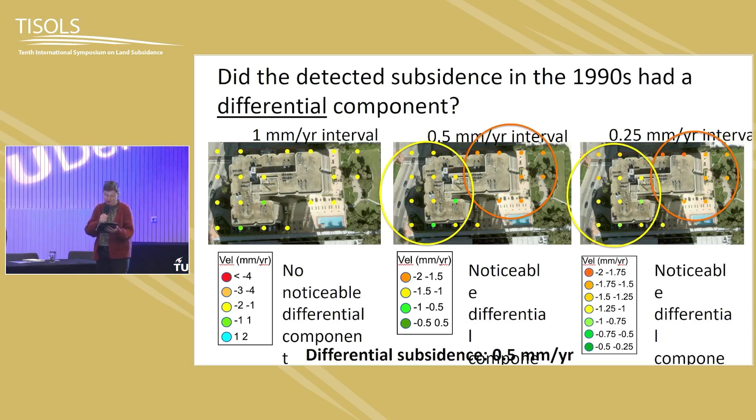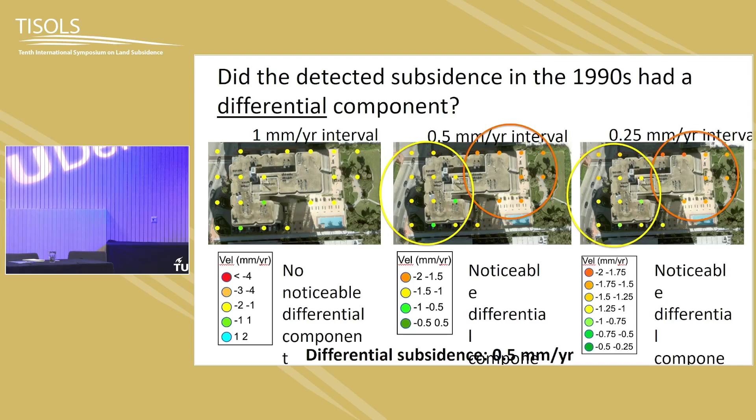Then now we move on to the last presentation in this session for today. It will be given by Yan Xu from the Geological Survey of Shanghai. And the presentation will be on a study on the influence of supertall building load on adjacent tunnel subsidence.

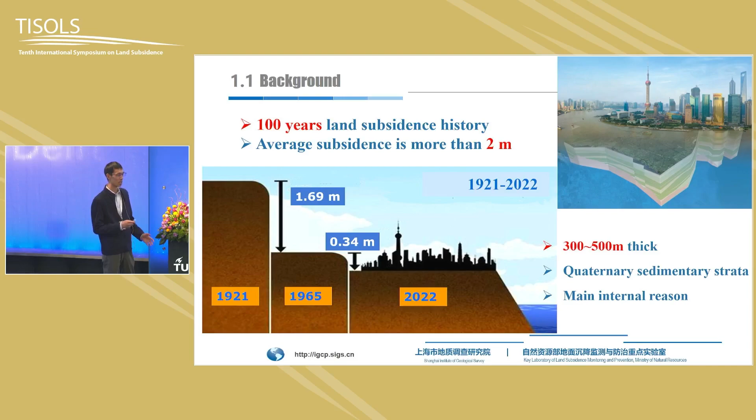So as we know, Shanghai has a long history of land subsidence and serious land subsidence. In the past 100 years, the average subsidence in Shanghai is more than 2 meters. So there are 300 to 500 meters thick quaternary sedimentary strata widely distributed in this area, which is the main internal reason of the land subsidence in Shanghai from the past until now. So for the urban development, there are various infrastructures that have to be built.

Okay. Okay, thank you very much.

Okay, thank you. So there are various infrastructures built at different depths in this subsoil, such as the municipal pipelines, the transport infrastructures, including the metro lines. Nowadays, the underground infrastructure is usually built below 40 meters. So I think it will be developed deeper and deeper in the future.

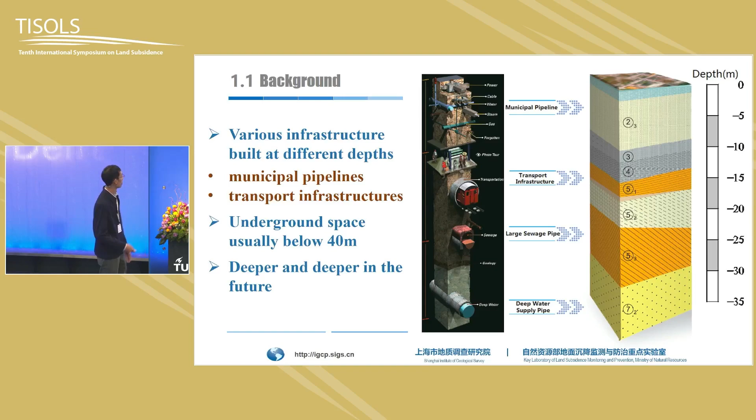So there are 5 confined aquifers in Shanghai under the ground surface. So the land subsidence characteristics here will develop with the change of the groundwater level and the process of urban development. So at present, under the premise of controlling land subsidence, the extraction of water from the aquifers is already less than 1 million tons a year. And the artificial recharge remains at a stage of 20 million tons a year. So the groundwater keeps rising here.

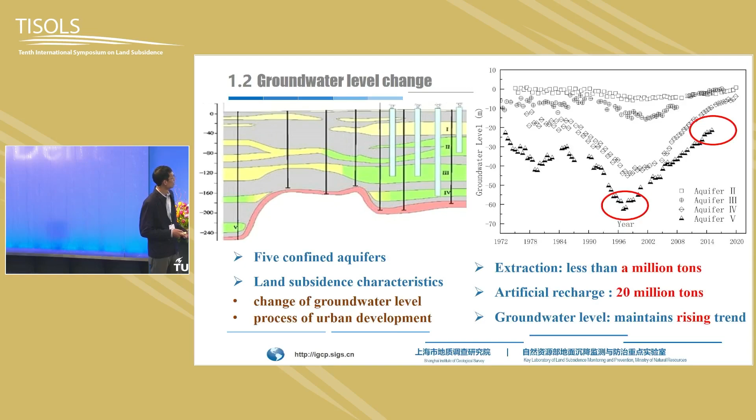And as we can see in the figure, by 2020, compared with the historical lowest water level of confined aquifer 5, the water level rose over 40 meters in the past years, and it still maintained a rising trend.

So the metro tunnel is usually built at a depth of 5 to 30 meters in soft soil areas. So the additional stress caused by the uneven deformation of the surrounding soil layers can apply directly to the underground tunnels passing through them.

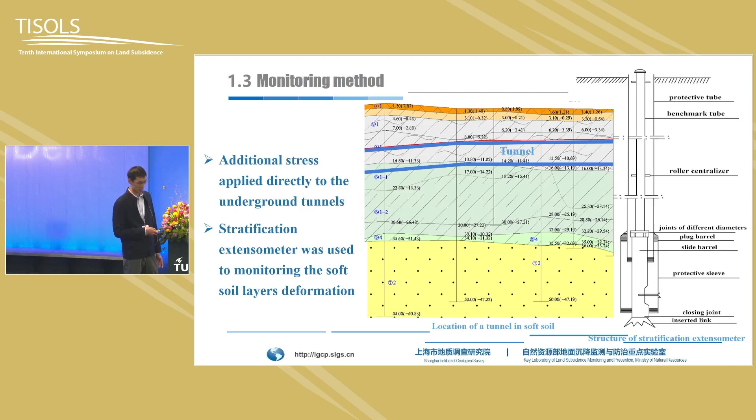So we use multiple methods to monitor the deformation of the soils, such as InSAR, GNSS, and leveling, as well as the stratification extensometers. So in this study, we analyze mainly based on the data from the extensometers. We selected 2 typical metro lines in Shanghai, and the monitoring work started when the tunnel construction was completed. And line B was built nearly 10 years after line A.

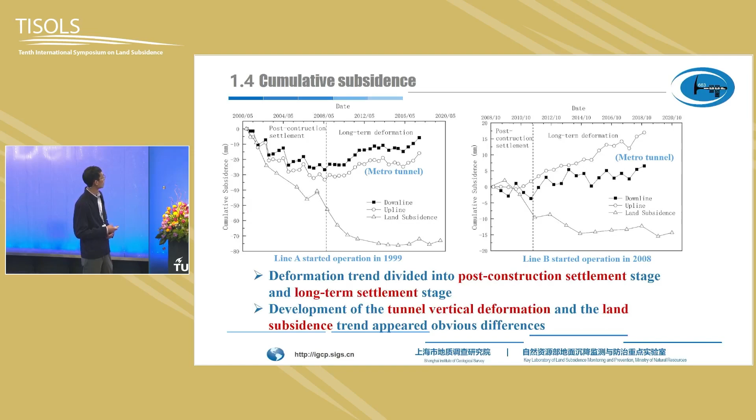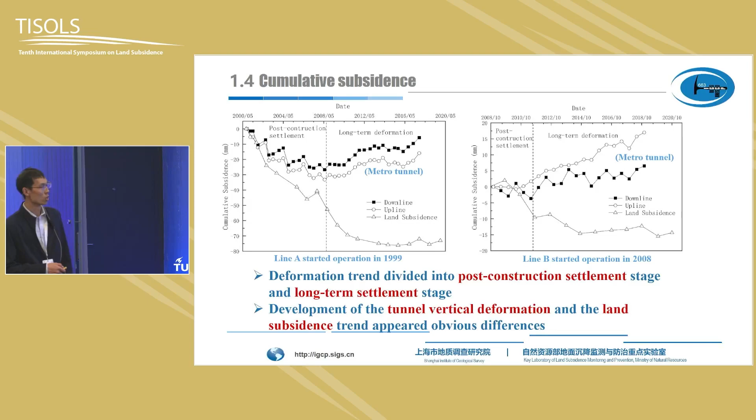We can see that the deformation trend of line A can be directly divided into the post-construction settlement and the long-term deformation stage. But the post-construction settlement of line B is short. But for both lines, the development of the tunnel vertical deformation and the land subsidence trend appeared obvious differences. So why is this?

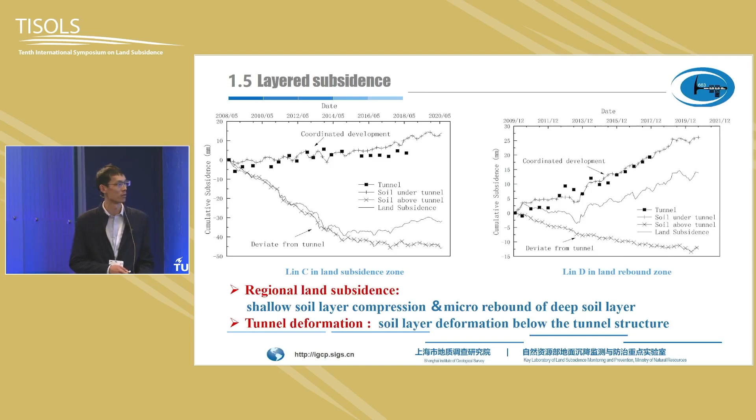But the soil layer under the tunnel appeared a trend of rebound, and the rebound rate is still accelerating. And for both tunnels, the tunnel deformation is coordinated and controlled by the soil layer deformation under the tunnel structure. So in the second part, I will introduce the influence of supertall building load on the adjacent tunnel subsidence.

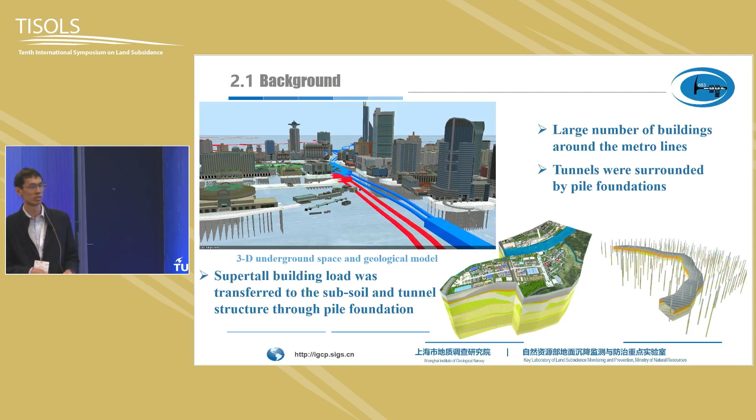For the functional needs of the city, there are usually large numbers of buildings around the tunnel. So the left picture is the 3D underground space and geological model of Shanghai. We can see that there are a lot of tunnels. The tunnels are surrounded by a lot of pile foundations, and the supertall building load can be transferred to the subsoil and the tunnel structure through the pile foundations.

So we selected a typical area in Shanghai for this analysis. The buildings B, C, and D are existing buildings over 300 meters high, and there is a park with no building built north of the tunnel, and the land subsidence monitoring station is located south of

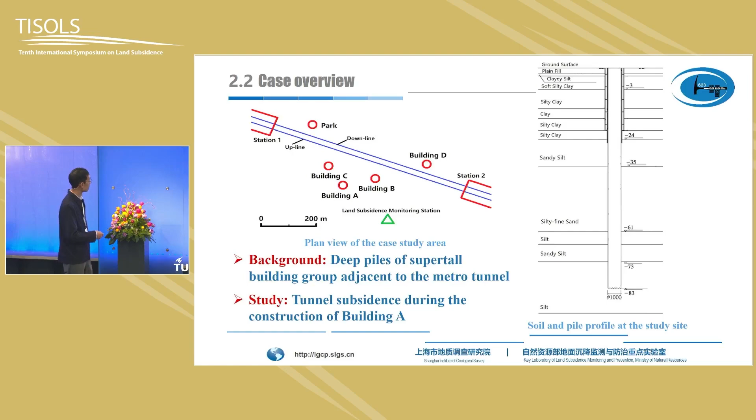this area. Building A is the newly built building with a height of over 500 meters, and the pile foundation of building A has a diameter of 1,000 millimeters and is 83 long. It passes through the soft clay and into the silt and sandy layer. So we will use this case to study the tunnel subsidence during the construction of building A.

So for a tunnel, the structure at each position will be affected by the surrounding tunnel structure. That means a deformation at a certain position of the tunnel will cause follow-up deformation of the surrounding tunnel structure. So in order to eliminate the influence of the general rebound, caused maybe by the groundwater level rise and the soil layer rebound, we set a reference point at the park.

There is no high-rise building built, and it is so interesting to find that the relative deformation appeared generally as subsidence instead of rebound. In the right picture, we can also find that the uneven subsidence can be clearly seen at the position of building A. So we successfully separated the influence of high-rise building load on the adjacent tunnel subsidence by setting reference points at the position of the park.

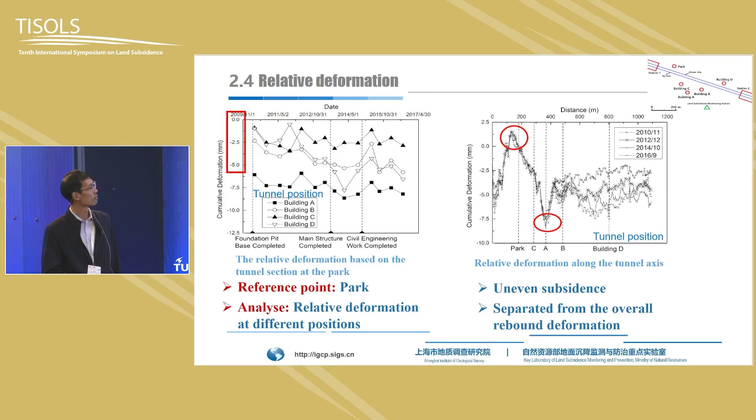So to study the influence of the supertall building load on adjacent tunnel structures, we should focus on the stress transfer pattern and the deformation of the deeper soils. As we know, the deformation of the tunnel structure is so complex that it's hard to describe accurately only from field monitoring data. So we also did some experiments to simplify the situation, and this part is not included in the 2020 paper submitted. I will make a brief introduction.

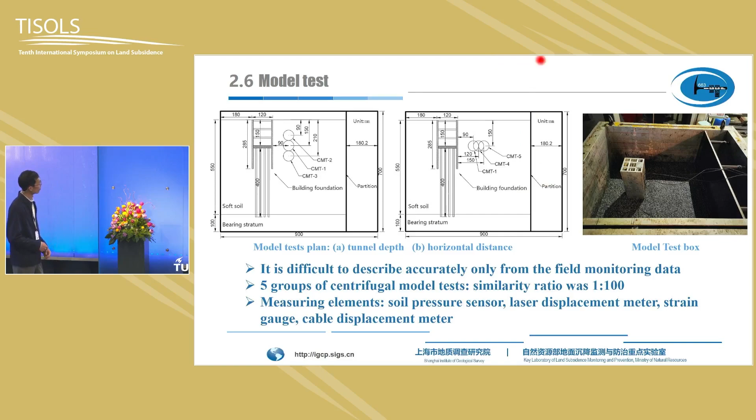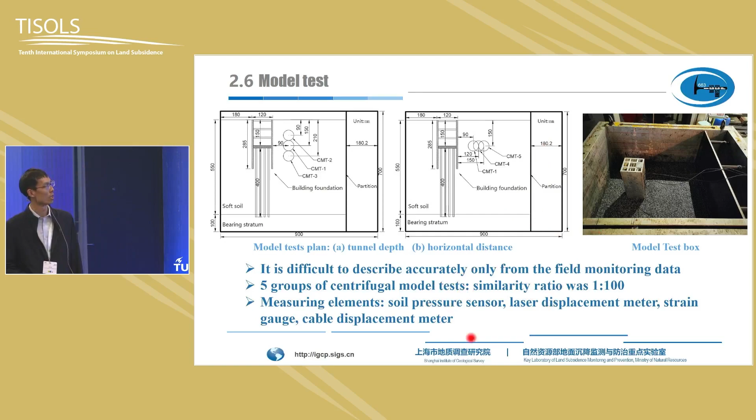First, we conducted 5 groups of centrifugal model tests, and the similarity ratio was 1 to 100. CMT1 is a standard group, the tunnel depth was changed in the CMT2 and CMT3 groups, and the horizontal distance between the tunnel and the pile structure was changed in the CMT4 and CMT5 groups. The measuring elements include the soil pressure sensor, the laser displacement meter, the strain gauge, as well as the cable displacement meter.

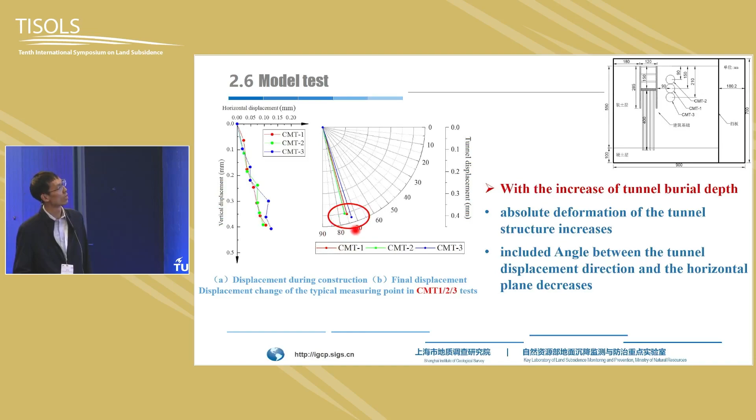From the preliminary results, the left picture is the displacement change of the typical measuring point in the CMT1, 2, and 3 tests. We can find that with the increase of the tunnel depth, the absolute deformation of the tunnel structure increases, and the included angle between the tunnel displacement direction and the horizontal plane decreases from 77 degrees to nearly 73 degrees. And another group focused on the factors of horizontal displacement.

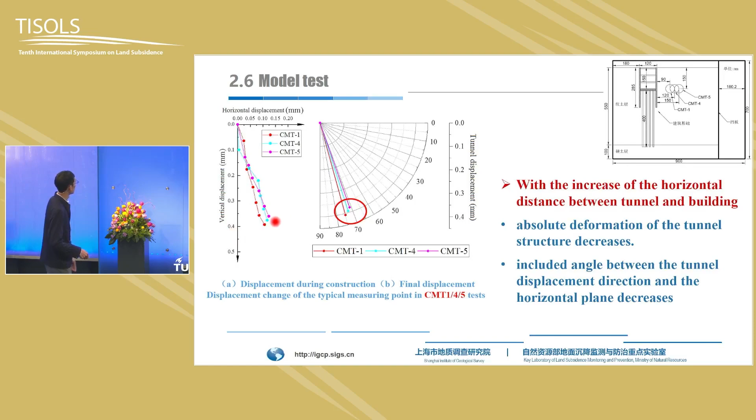So with the increase of the horizontal distance between the tunnel and the building, the absolute deformation of the tunnel structure decreases, which is different from the last group. And the included angle between the tunnel displacement direction and the horizontal plane decreases from maybe 75 degrees

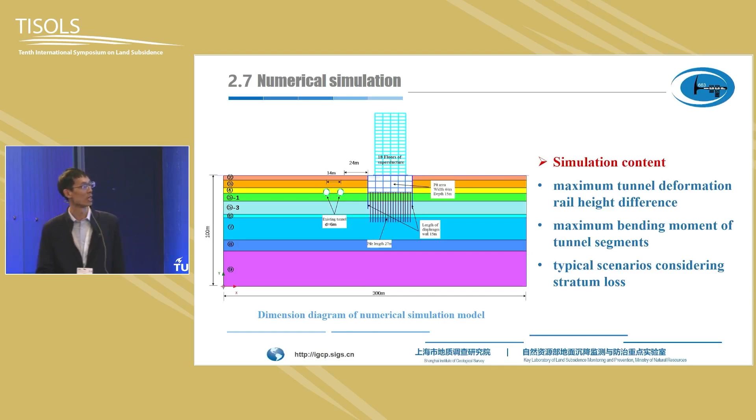to 71 degrees. As a supplement to the centrifugal model test, we also did some finite element numerical simulation for some special scenarios. The maximum tunnel deformation, height difference, and maximum bending moment of the tunnel segment were analyzed by changing the excavation depth of the foundation pit and the relative position between the pile and the tunnel, like this. Two more typical scenarios considering strata loss were also considered.

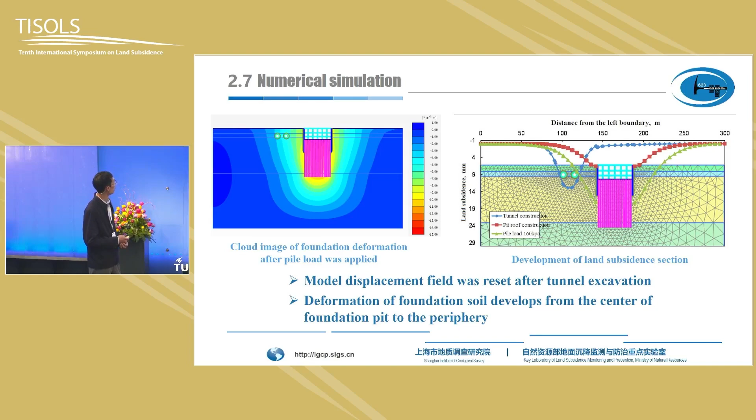The left picture is the cloud image of the foundation deformation under the pile load. After the pile load was applied, we should note that the model displacement field was reset after tunnel excavation, which indicates that the impact of tunnel excavation was ignored in this analysis. We can find that the deformation of the foundation soil developed from the center of the foundation pit to the periphery.

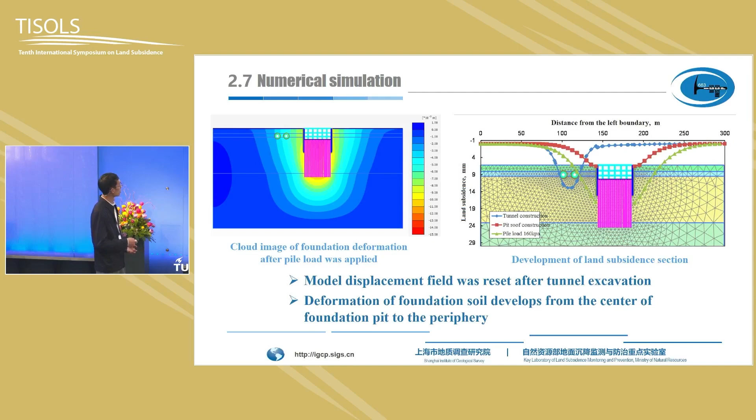And in the right picture, we can also find the development of the land subsidence section. We can clearly see the development of the land subsidence funnel.

So lastly, I will make some conclusions. First, the present regional land subsidence in the Shanghai area is the result of the superposition effect of shallow soil layer compression and deep soil layer rebound. Second, with the change of geological environment conditions, the sensitivity of tunnel displacement to deep soil layer deformation was higher than to ground displacement.

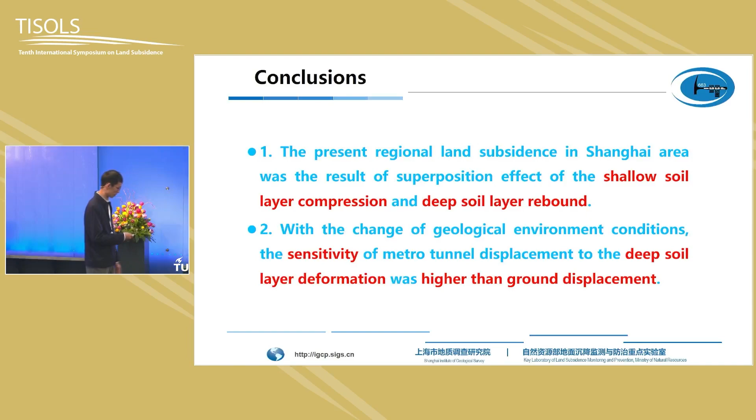Third, the tunnel displacement developed in coordination with the underlying soil deformation, and the stress transfer pattern is the key to evaluating the influence of high-rise building load on adjacent tunnel structures. Fourth, the factors affecting underground infrastructure are more complex, so the next step of this study requires more single-factor analysis by other methods.

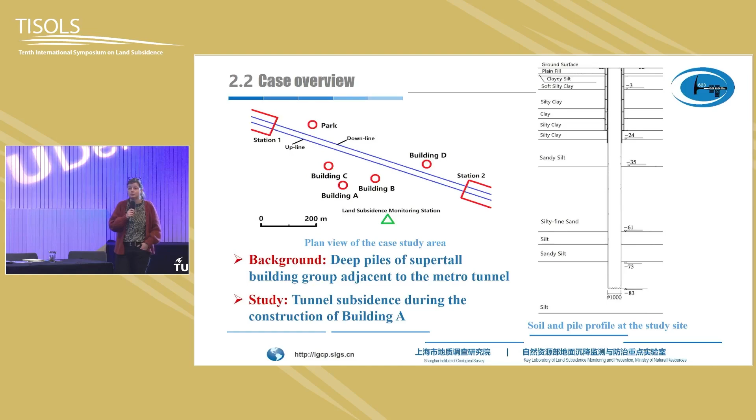Yes, I think it's valuable and a key point of this study, because the factors affecting the tunnel structure are so complex, so we try to separate the single factors. In this case, building A was built nearly 10 years after buildings B, C, and D. We can't completely remove the effect of B, C, and D, but because we set our reference points in the park, an area also affected by the other buildings, we try to eliminate the influence of the other buildings, as well as the influence of geological environment change, such as groundwater level rising.

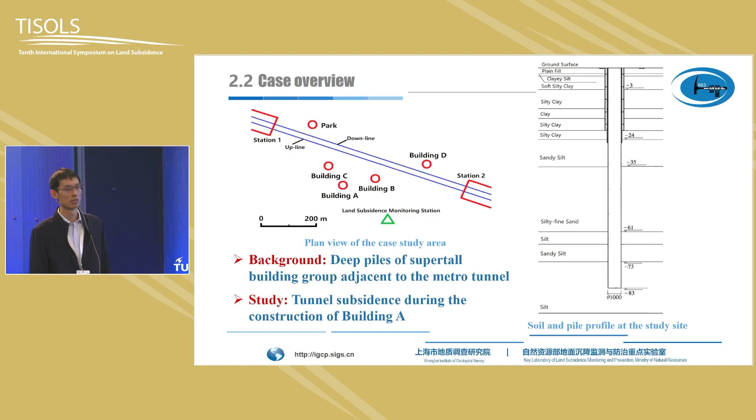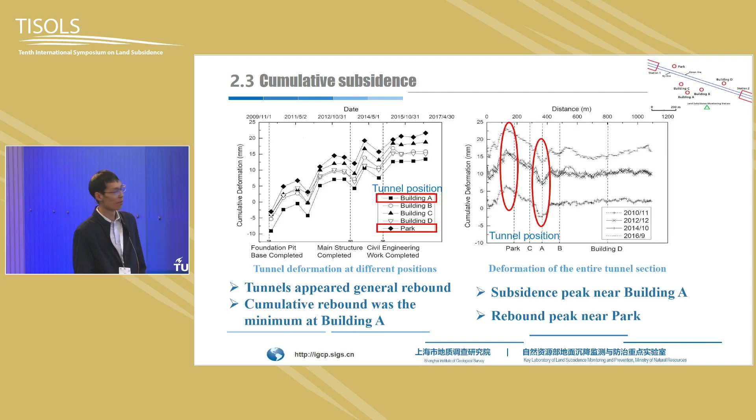Okay. So can this be purely attributed to groundwater lowering because of the construction pit, or is part of the deformation maybe also caused by groundwater extraction in the neighborhood? Yes, we can see that first, in absolute terms, in this area the tunnel generally rebounded. But when we set a reference point, the relative deformation appeared as subsidence. In this area the land and soil layers generally started to rebound, but for the tunnel the relative deformation is subsidence. It may be caused by the adjacent supertall building load. Yes. Okay.